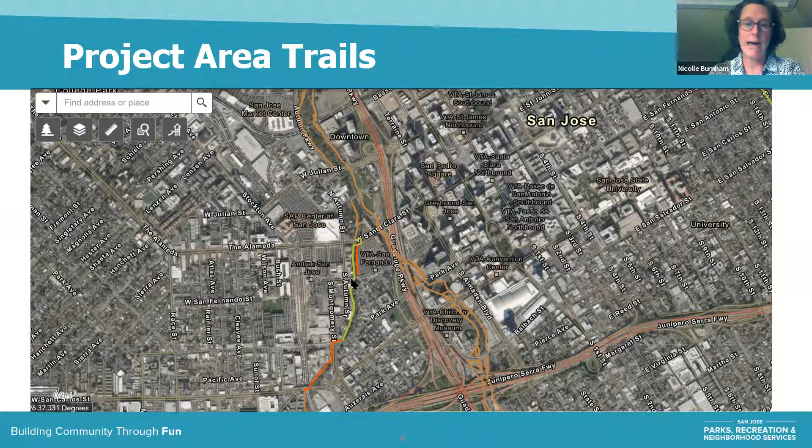One of the things we're working on through the projects, and the Diridon Station Area Plan, is connecting - this is Los Gatos Creek connector and the Los Gatos Creek Trail. Los Gatos Creek itself intersects with Guadalupe River here at what we call Confluence Point. This trail network can actually take you all the way to Los Gatos, and if you use off-road trails, to Lexington Reservoir. We have built out much of it, but there's been a gap remaining from West San Carlos Street all the way to Santa Clara. So you'll see through both the Google project as well as through the Diridon Station Area Plan, we're seeking to close this gap. This is a really important gap closure for us.

And then in terms of parks in the area, of course we have Arena Green, smack in the middle of this area that is the subject of the Urban Confluence project. What we call Guadalupe River Park extends from Discovery Meadow down here at the bottom of this graphic, and it actually extends all the way up to the airport. So it's a large linear park system - it's our largest in the downtown.

It is surrounded by a number of smaller, very urban parks. I'm going to show you some graphics of our downtown area, but this is the core of San Jose's downtown: City Hall Plaza, St. James Park - these are all existing parks. This is our oldest park in the city, Plaza de Cesar Chavez, a highly activated park with a lot of concerts, so a fair amount of hardscape.

This area to the east of Highway 87 and north of Julian Street, surrounded by Julian Street north and south, is an area called North San Pedro. It's a former industrial area that's rapidly redeveloping into residential. So we have new parks coming in there, and Cahill Park, to the west of Diridon Station, also plays an important role.

But you can also see that as we come into the west area of the city, we really don't have a lot of parks - there's not a lot of parkland over here. So it makes that Guadalupe River Park a really important green connector through the city.

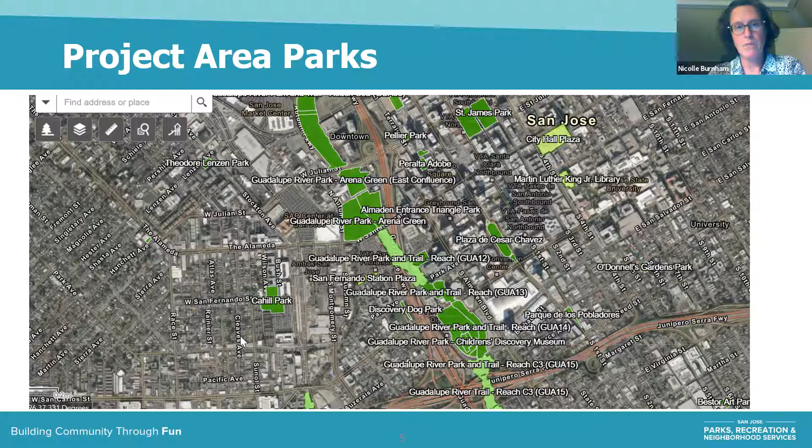In Parks and Rec, when we're working through prioritizing projects and understanding projects, we rely on a strategic plan that we developed and published. It got approved in December of 2019. It outlines 5 guiding principles that help us with our decision making.

The first of those is stewardship - taking care of what we have and managing it as effectively as we can, even if that means finding creative ways to do that by working with partners.

Nature - providing access to nature and promoting outdoor spaces that are accessible for everyone. Equity and access - making sure we have spaces that are available for everyone regardless of ability and background.

Identity - how do we use our park system and recreation facilities to create an identity for the city of San Jose? And public life - we play an important role in activation of our parks as well as our downtown and throughout the city through programs like Viva Calle and Viva Parks. So these are the kinds of things we think about regularly when we're thinking about projects.

Then I'm going to flip for a minute and talk about the Diridon Station area plan. I'll show you the Diridon Station area plan area in a moment, but this is just a generalized image - so this is Highway 87 and this is 280. This is the Diridon Station and SAP, which you can see in white here.

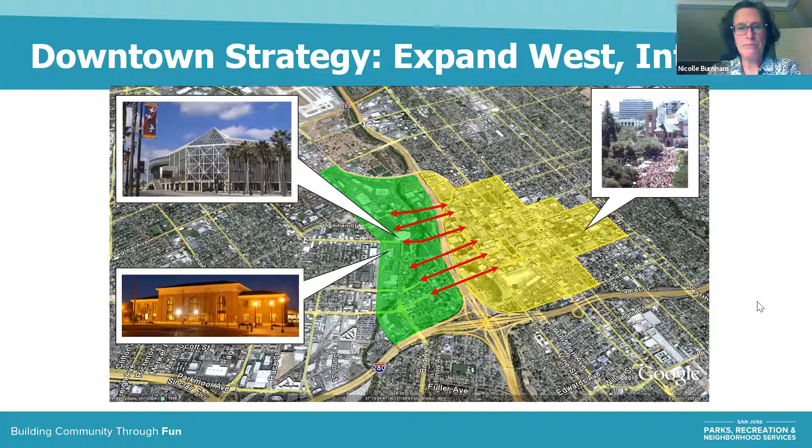One of the reasons that the Diridon area is a significant focus point of ours is because Diridon Station has a lot going on. We have a lot going on transportation-wise in San Jose. There is transit planning here between Caltrain, high-speed rail, VTA, things like BART coming through, the expansion of high-speed rail.

We're expecting and projecting significant passenger load increasing in the Diridon Station over the next 20 to 30 years. That would make it one of the most heavily used rail stations in the West. So we're planning for those people - that's really what we're talking about here.

So this is an overview that shows you the Diridon Station area. In the yellow with red outline is what we're talking about - this is the Diridon Station planning area. We're going to focus on this larger area first.

The yellow outline is from a 2014 Diridon Station area plan, and we're amending it for 2020. The 2020 amendment is shown in red. We're actually expanding the boundary of it slightly with the 2020 amendment. But really, you know, this larger area is about 240 acres.

Shown within this area, for the next few slides, we're really going to be focusing on this outer area. And then toward the end of the presentation, I'll show you some of what's here in this purple area - this is the property that's owned by Google. So you can see that Google owns a significant piece of the Diridon Station area.

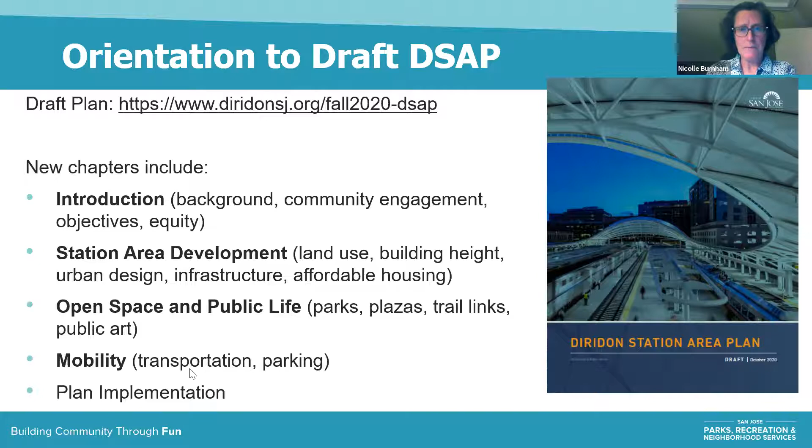What I'm focusing on is those areas of the plan that I think might be of most interest or value to those of you on the Urban Confluence teams, who might want some context for your project. I'm by no means giving a complete overview of this whole plan.

So what we are looking at in round numbers is an increase in housing capacity of up to 13,000 housing units, with a projected population increase of up to 25,000 residents. These are definitely draft numbers, but that's about where we are. About 75% of that new residential development, we expect to be high rise.

The Diridon Station area plan has had a significant amount of community engagement over a number of years. This slide is outlining some of the results of that engagement and what staff heard from the community: we want to rely on the train station, high density.

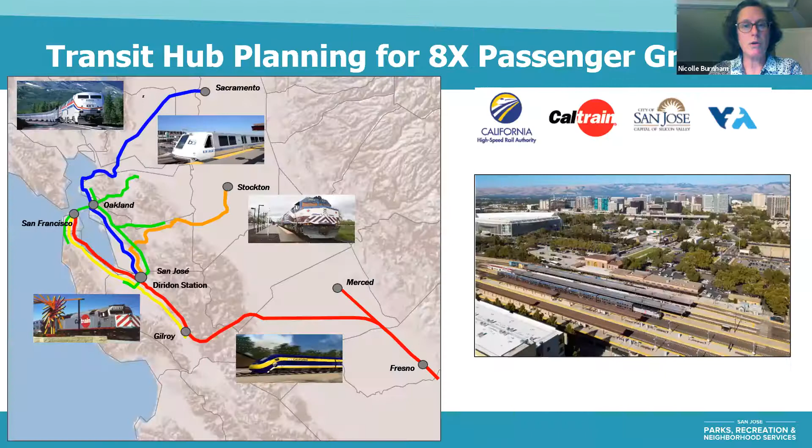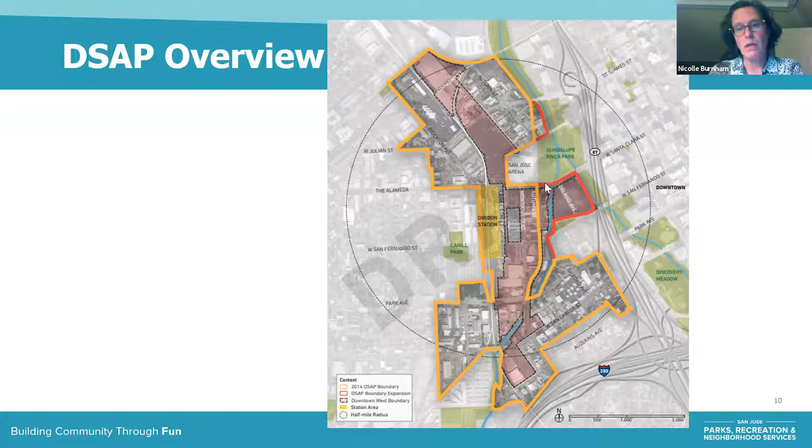I'm going to back up for a second and just make sure everyone is oriented, because north is to the top of this sheet. So this is where we're talking about Diridon Station, and this is the SAP Arena, and this is Arena Green. That is the subject of the Urban Confluence location, so that's why the train station becomes such an important part of this.

So the desired outcome of our land use is making sure that the train station takes full advantage, that development around it takes full advantage of those transit improvements and creates walkable communities that are integrated with downtown, but are human scaled and accentuate public life. I'm not going to read through all the bullets on these slides, but this will get posted later for the public.

One of the big changes in this area that will make it very different 10 to 20 years from now is the ability to build high rise. This is a recent change resulting from some changes in work with our airport.

Those of you who are Arena Green or Urban Confluence contestants are aware of the height limitations presented by the airport. But these height limitations were recently increased. Your design documents reflect these increased height areas, but it's made a big difference for the potential development community down here, where we start to be able to see high-rise buildings.

We're talking buildings of up to 280 feet, 255 feet, 290 feet. This is a significant change and will significantly increase the density of development, both residential and commercial, in the area.

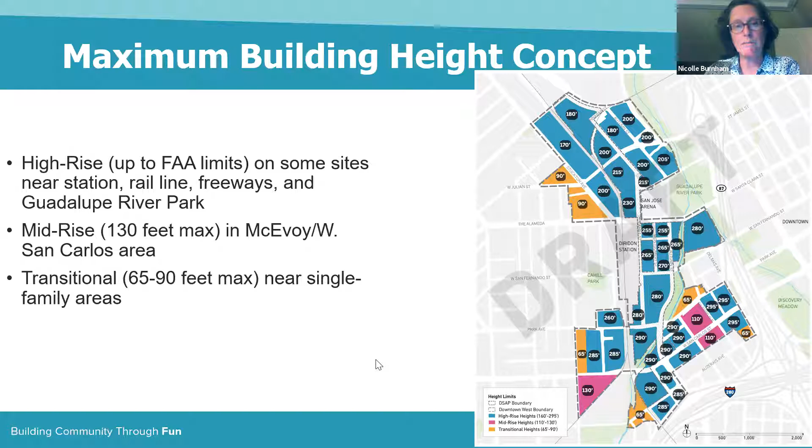Moving into public space, what we heard through the community outcomes was 5 basic themes: safety and maintenance—people want to feel safe and they want well-maintained, clean spaces to be in. They wanted to see trail connectivity, and they wanted equity and access—to be able to get to these spaces and feel like they are for everybody, available for anyone in the community regardless of their background.

We heard a lot about the value of smaller spaces spread throughout, rather than the suburban form of San Jose with large 5 and 10 acre parks. I think you'll see this reflected in the plan. And the community encouraged us to think about new models of how we're going to maintain and activate these spaces.

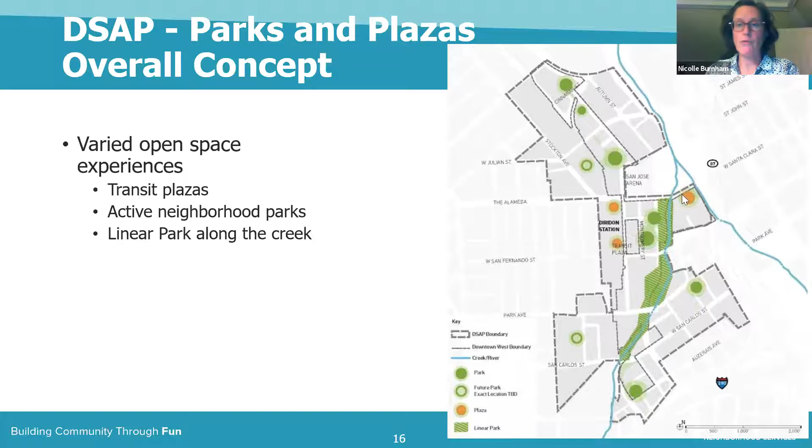The gap here, West San Fernando to Park Avenue, we would like to fill in with an off-street bike connection in the future. In the interim, it will be built out through on-street bike lanes. The context of this whole area is very bikeable, pedestrian friendly.

One of the things we are struggling with and still trying to understand is how to get across Santa Clara Street. Right now, the current plan calls for an at-grade crossing, which would be a fairly significant pedestrian crossing. Staff has proposed in the long run a signature bridge flyover from San Fernando up to the Guadalupe River Park at Arena Green East.

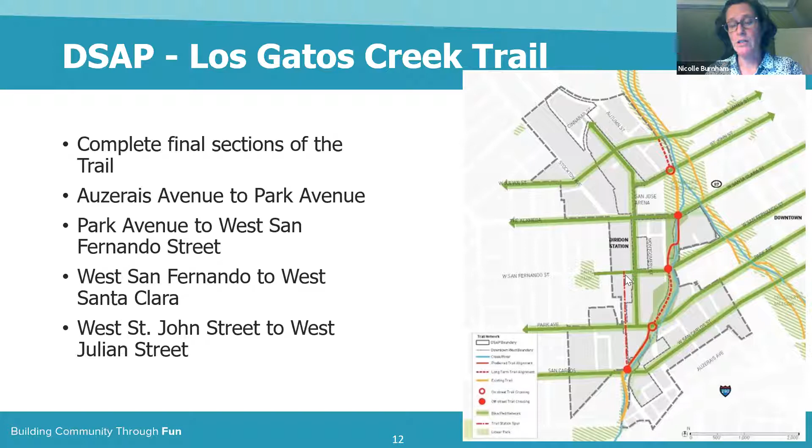In terms of community input on the transportation side, what staff heard about in doing outreach for the Diridon Station area plan was a desire for pedestrian friendly streets, direct trail and bike connections to Diridon, safe intersections, minimizing traffic congestion, and enhancing transit to make it easier to use and access for everybody.

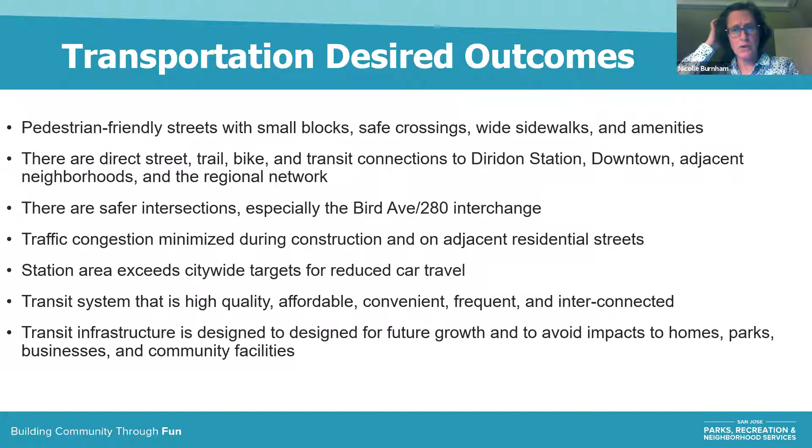In terms of transit, and this is for folks in the urban confluence design teams who may want to geek out on transit related improvements, we are right now talking about the Diridon Station area plan. We're going to talk in a moment about downtown west, but there are two other significant planning projects you can find by Googling their names. DISC is the Diridon Integrated Station Concept Plan, which is the planning for a new rail station to support all these proposed changes in use.

And the downtown transportation plan, which is a broader study area you see outlined here. I only mention it because the urban confluence finds some of this interesting as they think about their designs.

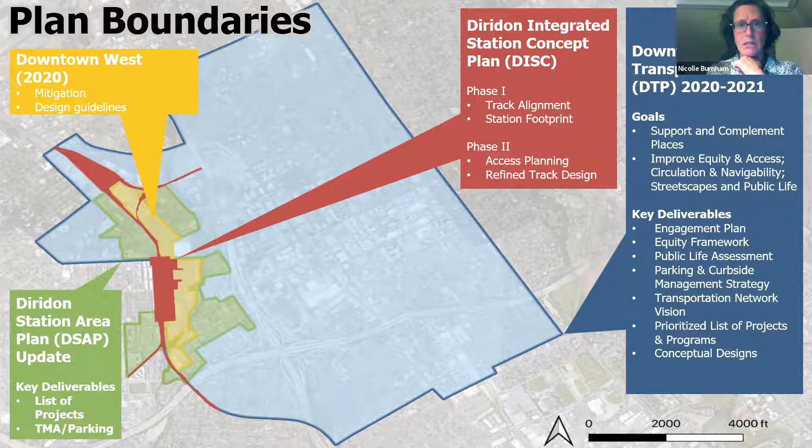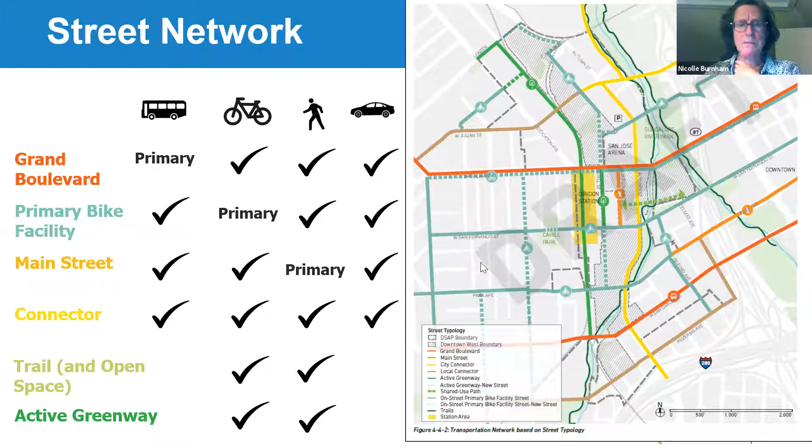Okay, so that was the Diridon Station area, and I know this is a lot of information. I can come back to these slides when you have questions, and right now I'm wishing I'd put numbers on them—it would make your life easier when coming back to them.

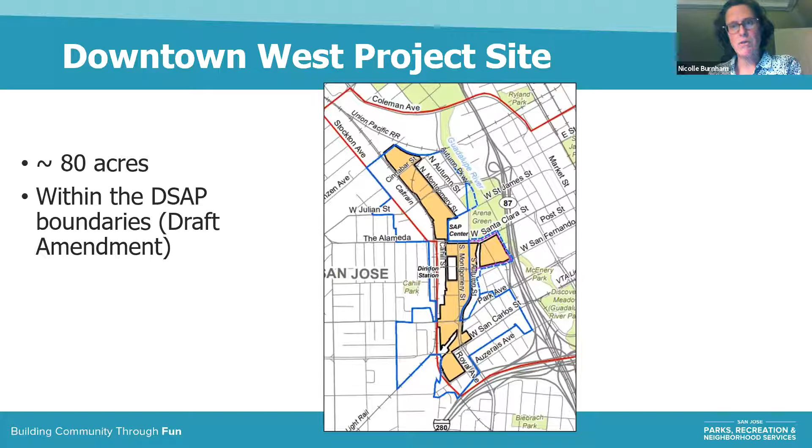This is the scope of the proposed development that Google's planning for. You can see a number of high-rise commercial buildings, 7.3 million square feet of office space, 4,000 housing units as a base with potential for more in the future, about 500,000 square feet of active uses—this would be retail, maybe cafes, art buildings, and a series of public parks and plazas that run through the development area.

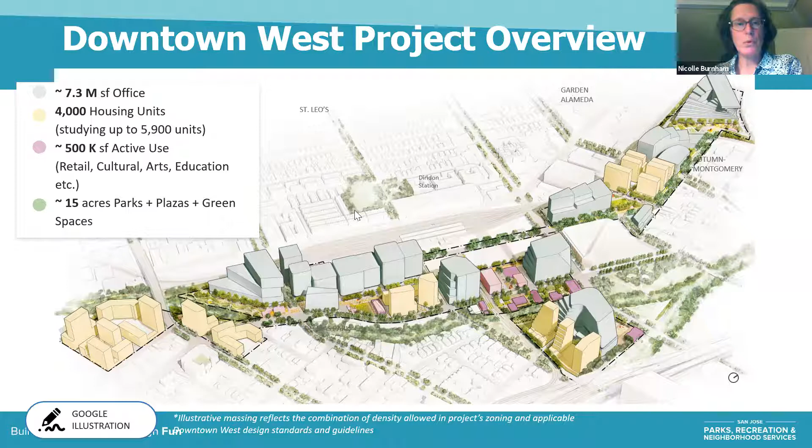Because the Google project is a master plan development that will take a number of years to build out, there is a document—a draft of it is available online—called the Downtown West Design Standards and Guidelines. These guidelines have chapters that govern various types of uses within the space and set out design standards and expectations. Right now, talking about parks since it's what I'm most familiar with, we don't have detailed design of every park, and we don't know the final details of every element that will be in every park, but the design guidelines for each park space give us an idea and some information about what will be included, what the programming might be, and what the goal of that park space is.

I mention this for the Urban Confluence team because I think this is information you might find helpful as you move forward thinking about your design and its context.

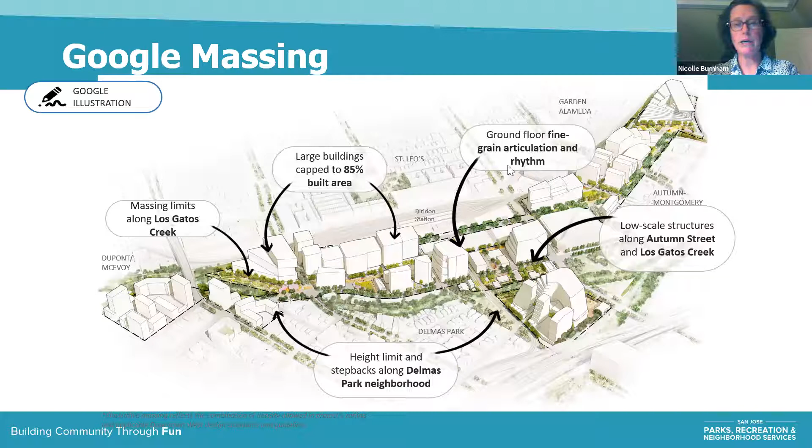So similar look to the last one we had, their massing diagram. Here are some concepts that have come from them that Google has provided. These are purely concepts from Google—they may change in the future, but at present this is the idea and flavor of the type of development strategy they're thinking about.

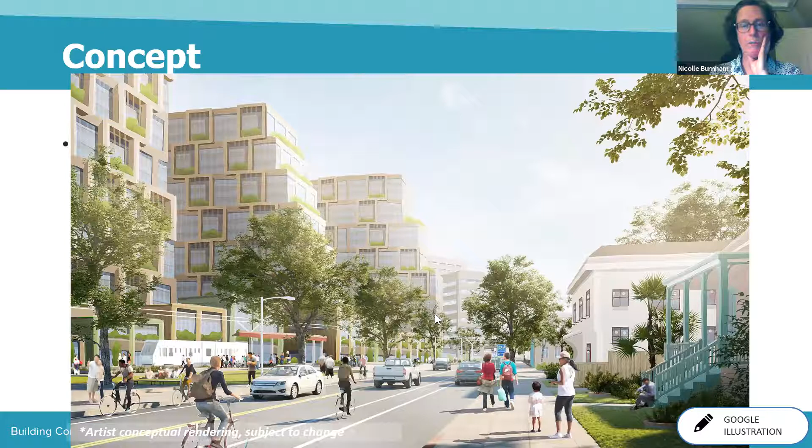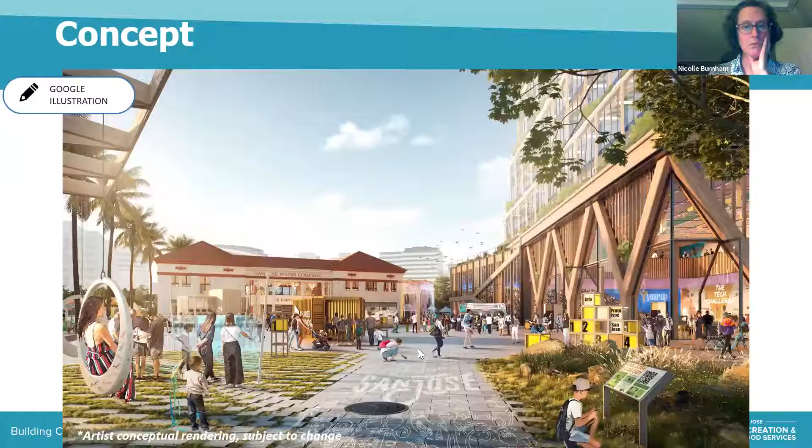This gives you a glimpse of potential future parkland with a crossing over Los Gatos Creek, interpretive panels, and public space. Those of you local to San Jose would know the San Jose Water Company building. So the one plaza I mentioned on Santa Clara Street—this is one of the view sheds of that plaza.

And with that, I'm going to end the presentation and we can open it up to Q&A, and I can go back to any of those slides if folks have questions or however we want to handle it.

Thank you, Nicolle. I will ask you the questions and help you any way I can. A common question is: will this presentation be made available in PDF for future reference?

Yes, we can. And I should have mentioned, especially for those of you who are local and interested in the projects, there is on that website I mentioned, diridonsj.org, a lot of presentations from staff given over the last two years. There's also a city council study session on Monday, starting at 1 o'clock, that will cover this information and then some—if folks have more interest, they can tune into that. And yes, I can make this into a PDF and share it with the Urban Confluence team so they can post it on their website. I need to get a couple of things checked on those Google concepts before I post it publicly.